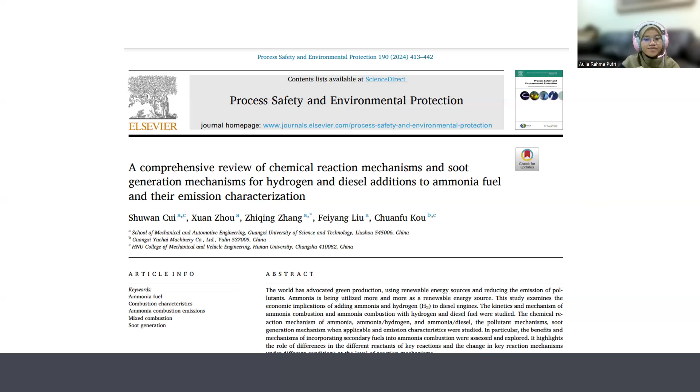The abstract of this article: urgency of using renewable energy to support green production and reduce pollutant emission, focusing on ammonia as a potential renewable energy source. The main points of the abstract include: ammonia is considered a promising fuel due to its renewable, zero carbon, and environmentally friendly properties. This article explored the use of ammonia in diesel engines, both as a primary fuel and a blend with hydrogen and diesel.

This study evaluated the kinetic and combustion mechanism of ammonia in pure form as well as its blend with hydrogen and diesel. The chemical reaction mechanism includes pollutant formation and emission characteristics. The study pays special attention to how fuel blends can affect combustion efficiency and reduce emission of pollutants, such as black carbon and nitrogen oxide.

This article highlights the difference in reactants in key reactions and change in reaction mechanism across different combustion conditions. The author examines how the reaction mechanism of the fuel mixture affects the formation and reduction of pollutants. This article provides deep insight into the potential of ammonia as a renewable fuel, as well as its blends with other fuels to address environmental challenges. It aims to promote further research on clean energy and greener combustion technology.

These figures show the development of the fossil fuel divestment movement from 2011 to 2021. Fossil fuel divestment is the process by which institutions or organizations withdraw their investment from the fossil fuel industry to support sustainability and fight climate change. This graph reflects the increasing global awareness of the adverse environmental impact of fossil fuels, encouraging institutions to seek cleaner energy alternatives.

Large assets on the move. The significant surge in assets after 2018 shows that large institutions with major financial clout are joining the movement, giving a broader impact to global energy transition and support for renewable energy. This divestment not only means a reduction in investment in fossil fuels, but also a possible redirection of those funds

to the renewable energy sector. This chart highlights the success of the fossil fuel divestment movement over the past decade, with exponential growth in the number of institutions participating and assets diverted. This trend reflects a global shift towards more environmentally responsible investment to support sustainability and climate change mitigation.

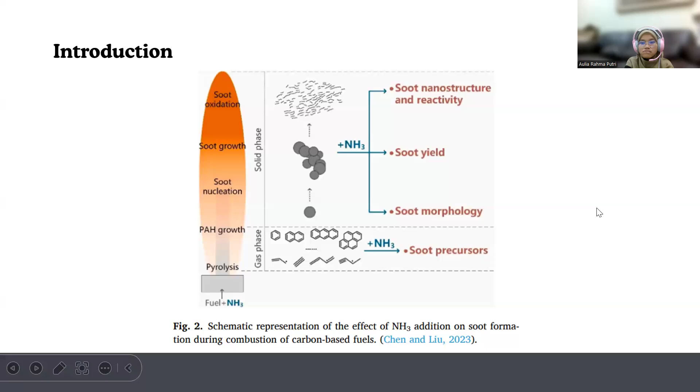The economic analysis of hydrogen and ammonia in diesel engines. This section of the journal discusses the economic aspects related to using hydrogen and ammonia as alternative fuels in diesel engines. While hydrogen and ammonia offer the potential to reduce greenhouse gas emission and pollution, their application in diesel engines requires careful cost analysis. Hydrogen production costs are still relatively high, especially for green hydrogen produced through water electrolysis using renewable energy.

Likewise, while ammonia is cheaper and easier to store than hydrogen, its production process, which relies on green hydrogen, still requires significant investment. Despite the high initial costs, research shows that the use of hydrogen and ammonia in diesel engines can reduce fossil fuel consumption and improve the engine thermal efficiency, contributing to long-term operational cost savings.

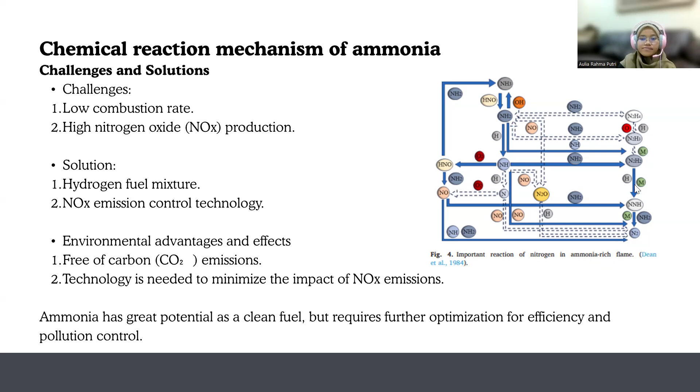The section on combustion characteristics and pollutant generation of ammonia in the journal discusses the combustion properties of ammonia as a whole, focusing on its environmental impact, particularly the formation of pollutants. Ammonia is a carbon-free fuel, meaning it doesn't produce carbon dioxide when burned. Ideally, the complete combustion of ammonia produces only nitrogen and water vapor, which is environmentally friendly.

However, ammonia has some limitations in combustion, such as a high ignition temperature, a narrow flammability range, and low flame speed, making it less stable compared to conventional fuels like diesel or hydrogen. A significant challenge in ammonia.

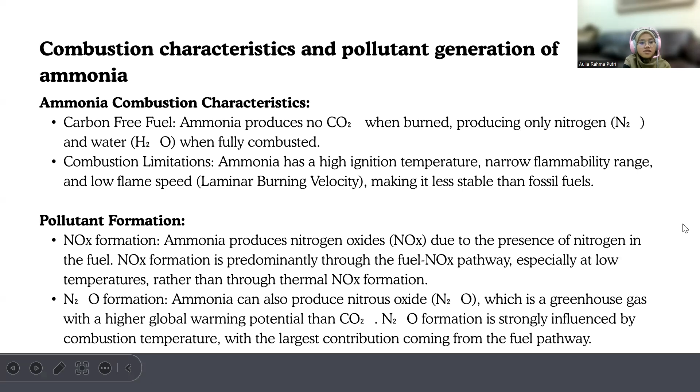The ammonia produced is used in various sectors, namely in the transportation sector as a fuel for ships and aircraft, while in the industrial sector as a raw material for fertilizer and pharmaceutical products. In this cycle, the nitrogen produced through ammonia combustion will return to the atmosphere and become part of the natural nitrogen cycle. This ensures that the use of ammonia produces no carbon, making it an environmentally friendly fuel. This process creates a circular economy as the fuel ammonia is produced, used, and recycled through the nitrogen cycle. And the energy required for ammonia production comes from renewable sources, resulting in no additional carbon emission.

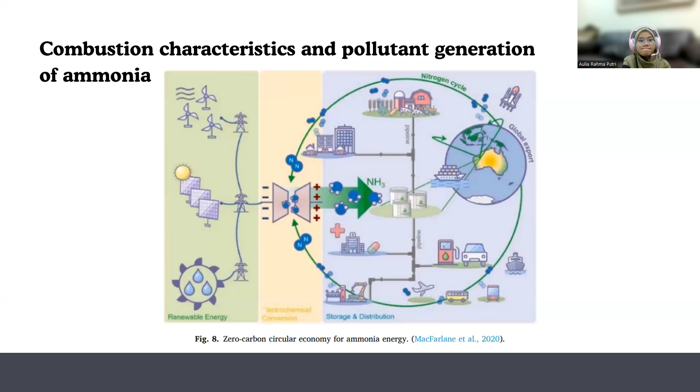The combustion characterization and pollutants generation of ammonia hydrogen. This section of the journal discusses the combustion characteristics and pollutant generation resulting from the combustion of a mixture of ammonia and hydrogen. Combustion of this mixture increases reactivity and flame speed because hydrogen, as a highly reactive fuel, helps accelerate the combustion process by increasing the formation of oxygen and hydrogen radicals. These radicals accelerate the combustion process, resulting in more efficient combustion. However, this increased reactivity also affects the flame temperature and composition of the combustion products, potentially affecting the formation of pollutants.

Although ammonia is a carbon-free fuel, combustion of ammonia and hydrogen mixture still results in nitrogen oxide emission, mainly due to the reaction of nitrogen from ammonia with oxygen at high temperature. This process, known as fuel nitrogen oxide formation, is more predominant in lean combustion where more oxygen is available. However, under rich combustion conditions, the denitrification process is dominant, which reduces nitrogen oxide emission but increases the formation of nitrous oxide, a more harmful greenhouse gas. The addition of hydrogen in the mixture increases the flame temperature, which exacerbates nitrogen oxide formation in lean conditions, but also reduces carbon dioxide and particulate emission, as the hydrogen burns cleanly without producing carbon.

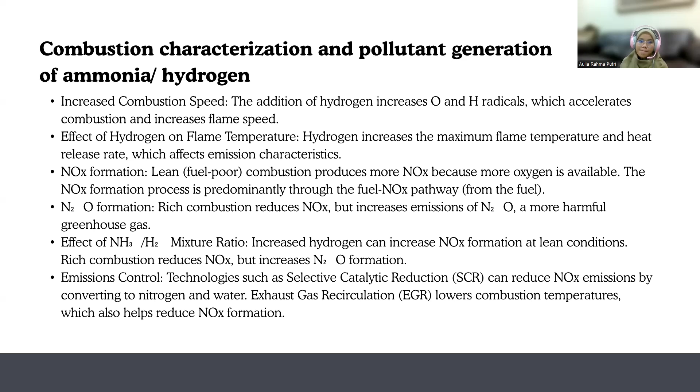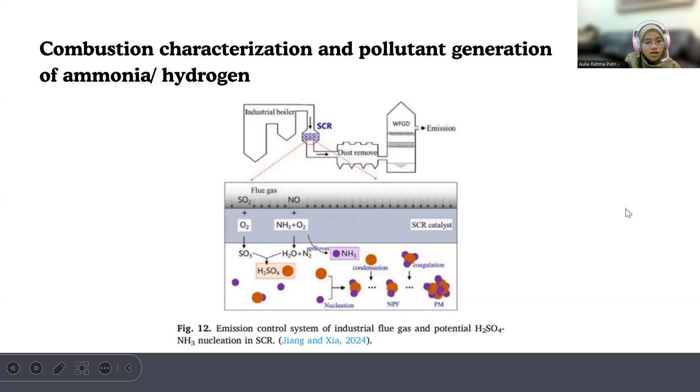The combustion characterization and pollutant generation of ammonia-diesel. This section of the journal discusses the combustion of a mixture of ammonia and diesel in dual fuel mode and its impact on combustion characteristics and pollutant generation. In dual fuel mode, the addition of ammonia helps improve combustion by reducing the amount of carbon burned and improving the combustion rate, which contributes to the reduction of carbon dioxide emission.

In addition, combustion temperature tends to be lower compared to single diesel combustion, which contributes to lower nitrogen oxide and carbon dioxide emission. However, increasing the ammonia energy ratio can increase nitrous oxide formation, especially at an ammonia energy ratio above 60%. At an ammonia energy ratio of around 35%, the combustion showed the best result, with a 23% reduction in carbon monoxide and a 20% reduction in nitrous oxide emission compared to single diesel combustion.

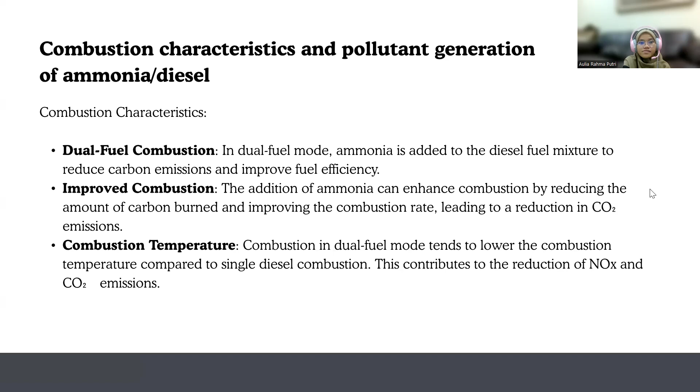In addition, this dual mode proved to be stable even when operated at higher altitudes where the intake mass flow and excess air coefficients decrease. This shows that ammonia-diesel combustion is not only effective at sea level but also at lower pressure atmospheric conditions. Overall, although dual fuel ammonia-diesel combustion successfully reduced carbon dioxide and nitrogen oxide emission, ammonia energy ratio control and optimization of combustion conditions are required to minimize N2O formation and achieve an optimal balance in emission reduction.

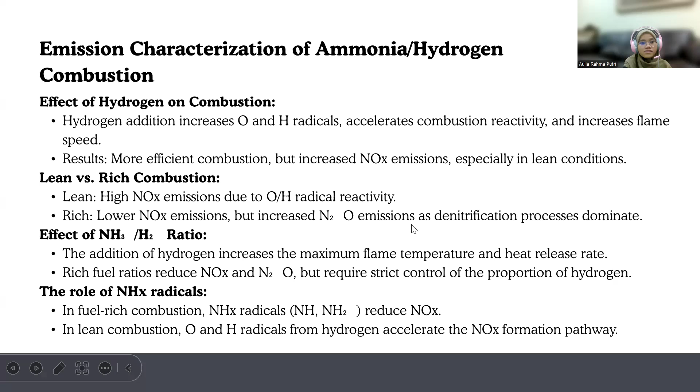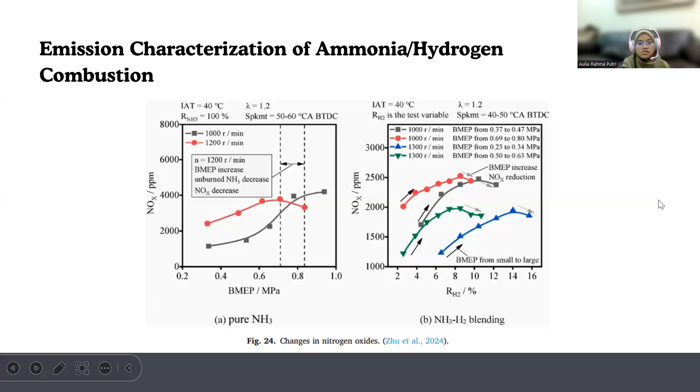The emission characteristics of ammonia-diesel combustion section of the journal discusses the emission patterns produced when ammonia is used as a fuel additive in dual fuel mode with diesel. The addition of ammonia in diesel combustion can reduce carbon dioxide and nitrogen oxide emissions thanks to the thermal denitrification process that occurs. This is due to the reaction between ammonia and oxygen, which reduces the formation of nitrogen monoxide via the reduction pathway, especially at higher temperature. In addition, this dual fuel combustion reduces the combustion temperature, which contributes to the reduction of carbon monoxide and nitrogen oxide emissions.

The conclusion section of the journal discusses the potential challenges and solutions related to the use of ammonia as a clean and sustainable alternative fuel. Ammonia is considered a carbon-free fuel with a high hydrogen content, 17.8% by mass, making it effective as an energy carrier. Compared to liquid hydrogen, ammonia has a higher volumetric energy density and lower storage and transportation costs. However, its use faces challenges, including low laminar burning velocity, 6 to 8 centimeters per second, high ignition energy requirements, and significant nitrogen oxide emissions, especially under lean or rich combustion conditions.

Several solutions are proposed to optimize ammonia combustion. Combustion under oxygen-rich conditions can increase the combustion rate to near methane-air combustion, although this may result in unburned ammonia emission. Controlling the fuel-air equivalence ratio at around 1.1 proves effective for reducing nitrogen oxide emission while limiting unburned ammonia. A slightly rich ratio of 1.05 to 1.2 significantly reduces nitrogen monoxide emission by breaking down unburned ammonia.